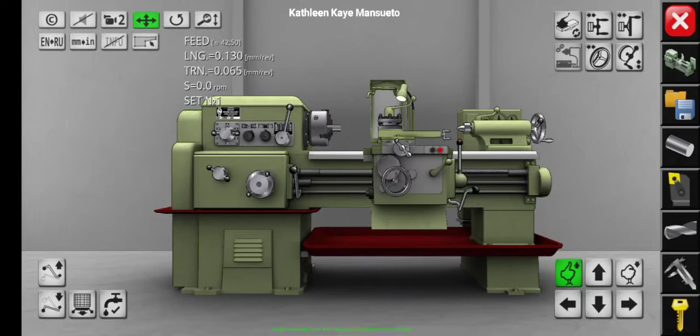Good day, I'm Kathleen Kaye Mansueto and I'm gonna show you the turning and undercutting operation.

First, we should not forget to turn on our lathe machine. Next, we are going to set our workpiece. The length is 90 mm, the diameter is 30 mm, and the offset is 75 mm.

And for the tool bit, I'm gonna use the number 5 for the turning operation, then the number 19 for taper turning. Lastly, the number 47 cut off for undercutting.

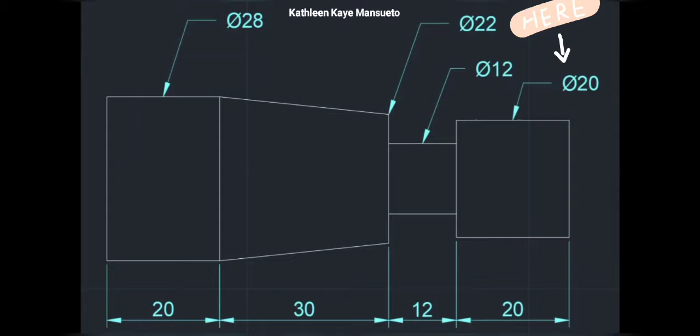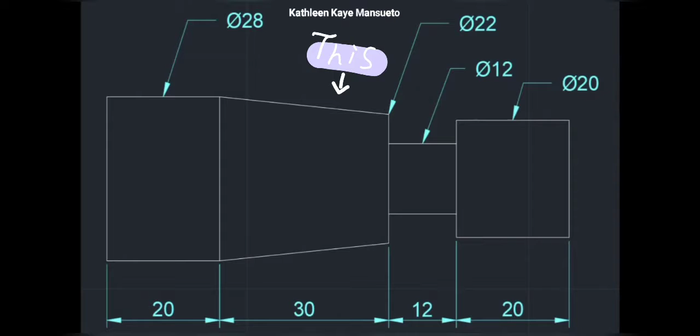So before we proceed to our taper and undercutting operation, let us check first the drawing plan. First is the 20 mm diameter and 20 mm length. Next is the 12 mm diameter and 12 mm length. Then the 22 mm diameter and 30 mm length. Lastly is the 28 mm diameter and 20 mm length.

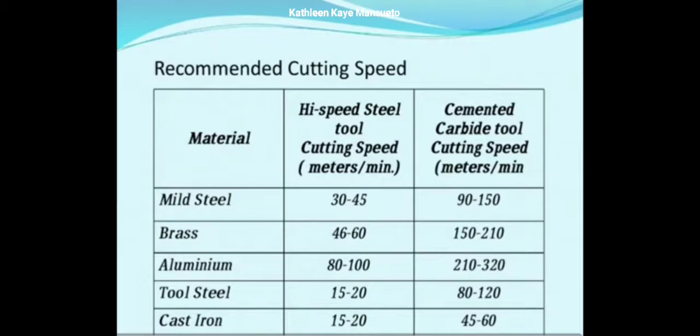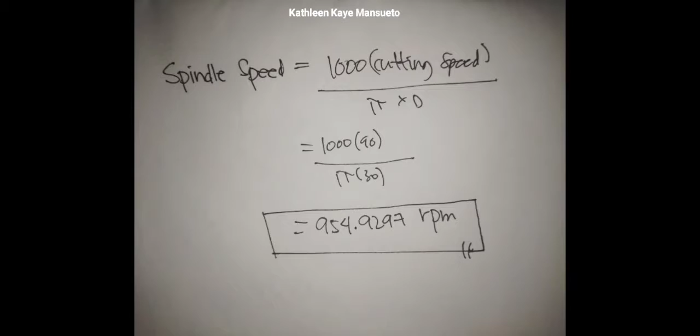We are going to set our spindle speed, but first we are going to calculate it. Since our material is mild steel, we will choose the cemented carbide tool cutting speed, which is 90. This is the solution and calculation for the spindle speed, and we get 954.9297 RPM. Since there is no exact value, we are going to set the spindle speed to 800 RPM since it is the nearest value.

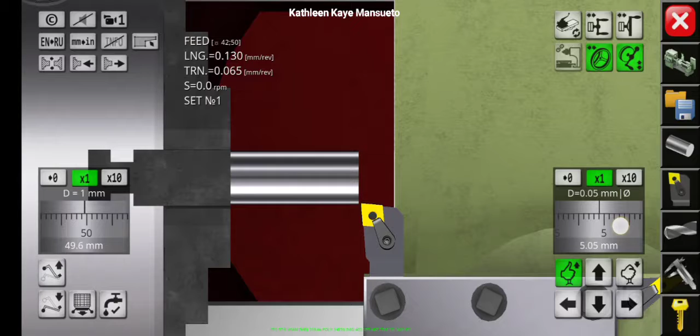Now we are going to move the carriage near to our material. And then we are going to calibrate it. After calibration, we will now start the 2 mm turning operation to get the 28 mm diameter.

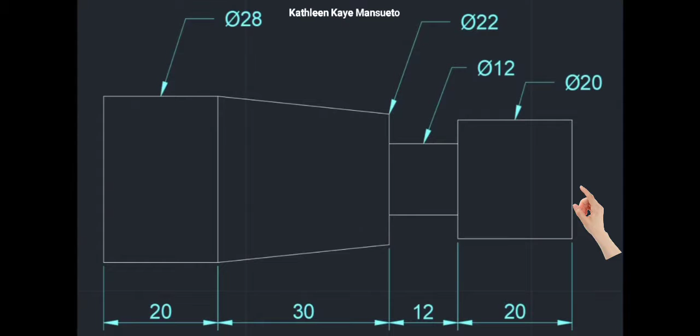Now let us check the vernier caliper to see the new measurements. Now we have a 28 mm diameter and a 90 mm length. Now let us start the next phase, which is the 20 mm diameter and 20 mm length. We will make 8 mm turning and 20 mm length since the total diameter is 28 mm.

Now let us check the new measurement. We have 70 mm length and the diameter is 20 mm. So now we are going to change the tool bit to number 47 cutoff for the undercutting. We will calibrate it to start the next phase, which is the 12 mm diameter and 12 mm length.

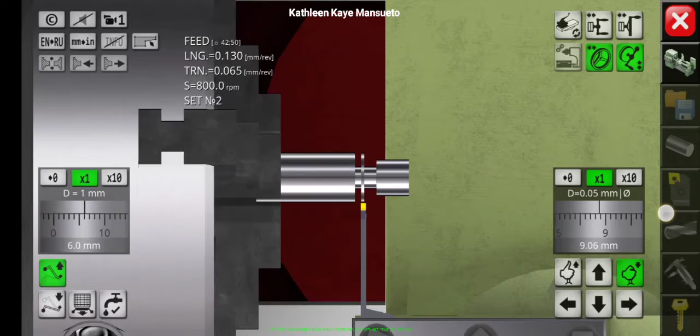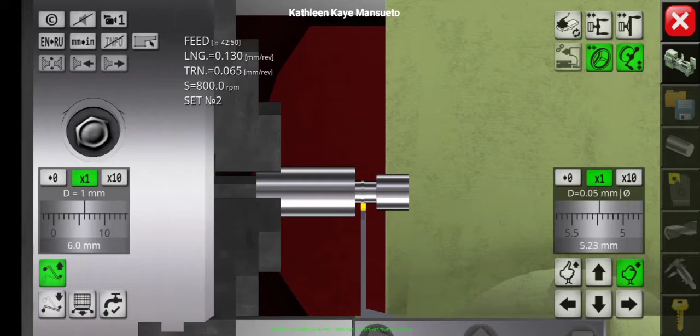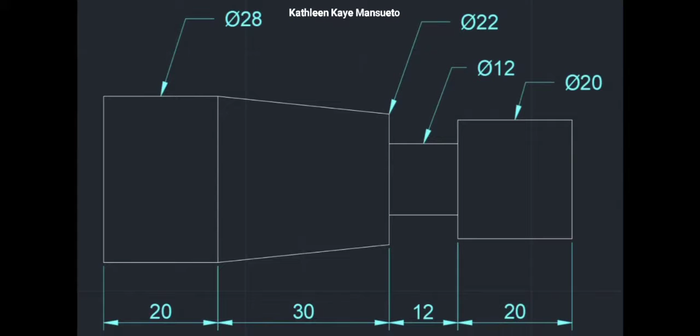Now we are done with our second phase, the 12 mm diameter and 12 mm length. So we will check the vernier caliper for the new measurement. Now we have 58 length and the diameter is 12. Now we are done with our undercutting operation. Now let us proceed to the third phase, which is the 22 mm diameter and 30 mm length.

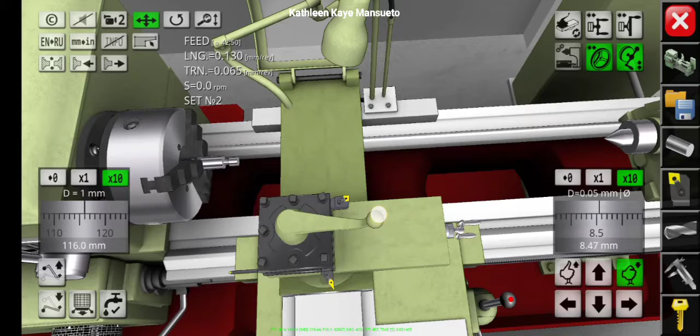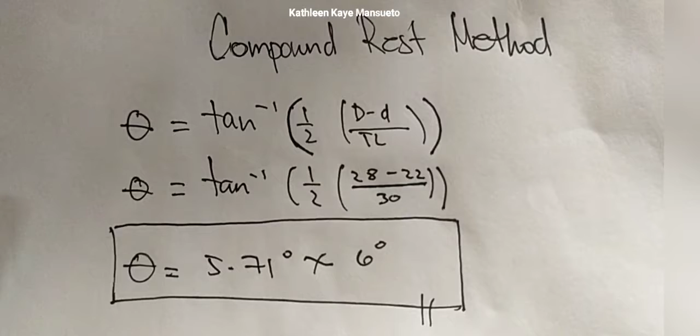We will change our tool bit for the taper turning operation. Since the angle is not given, we will calculate the angle using the compound rest method. And here is our calculation, and we get an angle of 5.71 degrees, but we will round it off to 6 degrees since there is no decimal in our lathe machine app.

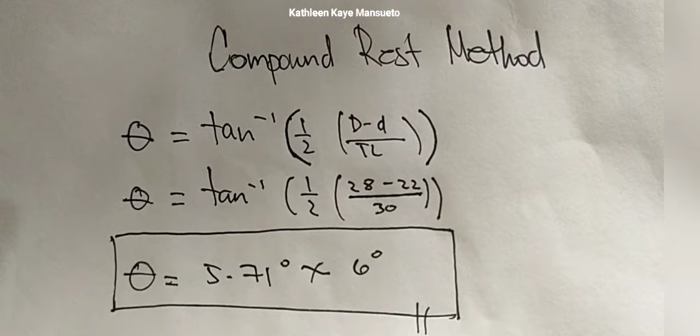So again, we will calibrate it to the longitudinal and set it to 0. And then after that, we will move it to 6 mm to get 22 mm diameter. We will use the taper handle to get the angle of 6 degrees.

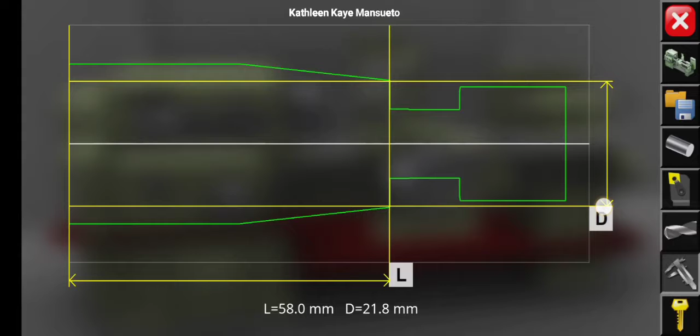So now we are done with our third phase and we have a new diameter of 22 mm. Now for the last part, we will do a facing operation to cut 8 mm to get the 82 mm length.